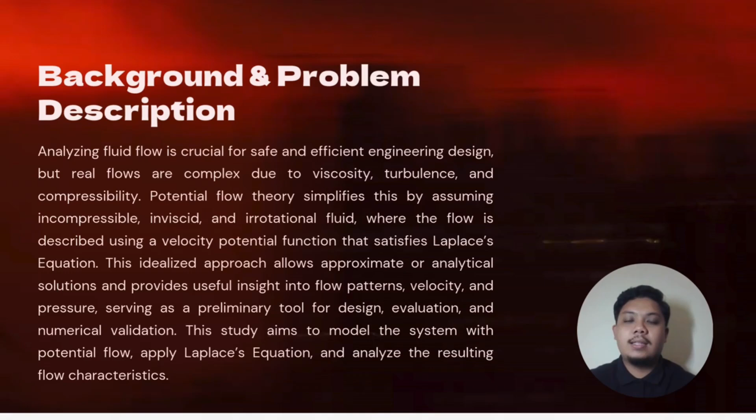For this study, the fluid flow is modeled using potential flow theory. The independent variables are the spatial coordinates x and y, while the dependent variable is the velocity potential. The velocity components are obtained as the spatial derivatives of the velocity potential. To simplify the governing equations,

several assumptions are made. The flow is incompressible, inviscid, irrotational, and steady. Under these assumptions, the governing equations reduce to the Laplace equation, which is an elliptic partial differential equation. This equation forms a mathematical foundation for approximating the fluid flow in this study.

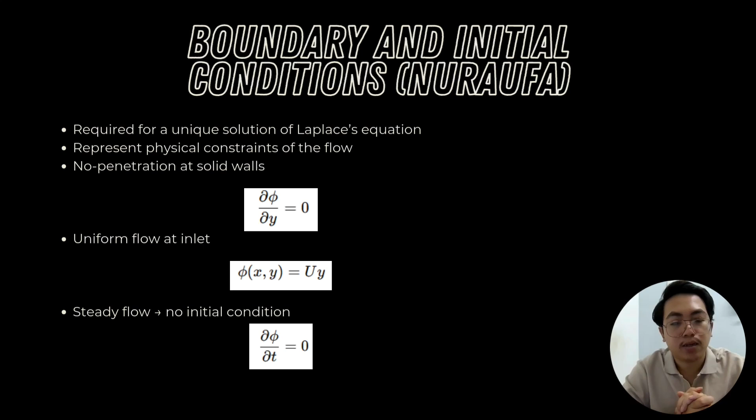Since the flow is assumed to be steady, initial conditions are not required. The next one is the solution methodology. The key point is that the governing Laplace equation is solved using analytical or numerical methods. The chosen method is separation of variables. It's suitable for simple geometry and linear boundary conditions.

So the fluid flow in this study is governed by Laplace equation. This equation can be solved using either analytical or numerical methods. In this project, the method of separation of variables is chosen because the geometry and boundary conditions are simple. This method provides a clear and efficient analytical solution for ideal potential flow.

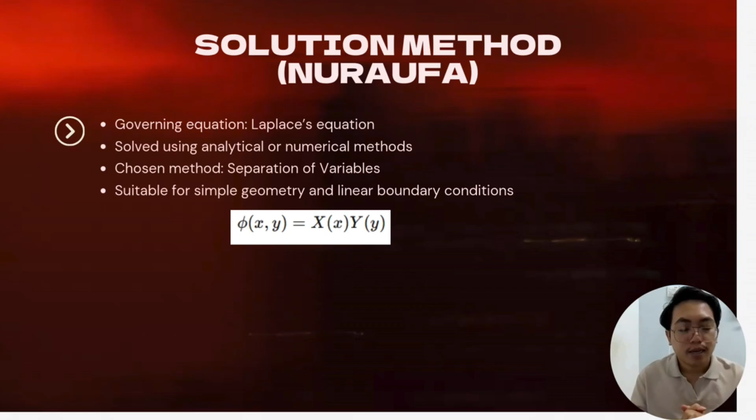My part is solution and sample calculation. First, on the left side, it shows the general solution for the velocity potential obtained using the method of separation of variables. The general form of velocity potential is φ(x,y) = (A cos λx + B sin λx)(C e^(λy) + D e^(-λy)). This is the general solution of Laplace equation for two-dimensional flow.

Next, based on the given condition, we consider a uniform flow where the velocity potential is simplified to φ(x,y) = Uy. This represents a flow moving uniformly in the vertical direction. In the middle part, we verify this velocity potential using Laplace equation. We calculate the second derivatives of φ with respect to x and y. Both second derivatives are zero, so when substituted into Laplace equation, the result becomes zero. This confirms that the chosen velocity potential satisfies the Laplace equation.

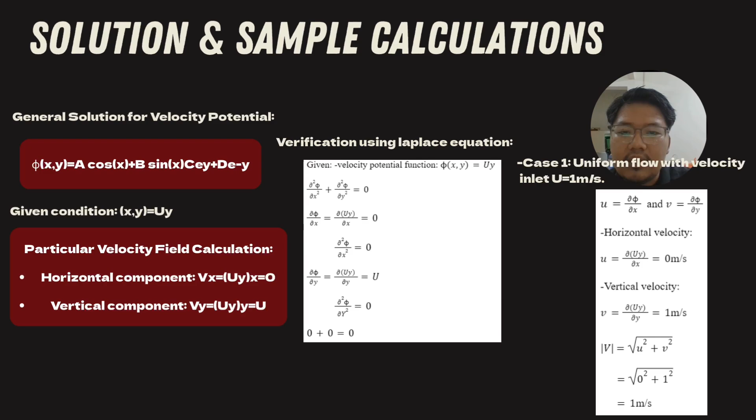On the right side, it shows case 1 where the inlet velocity is U = 1 m/s. Using the velocity potential, we calculate the velocity components. The horizontal velocity u is 0 and the vertical velocity v is 1 m/s. The velocity magnitude is therefore 1 m/s. This result shows that the flow is uniform, steady, incompressible, and irrotational, which is consistent with the assumptions of potential flow theory. Thank you.

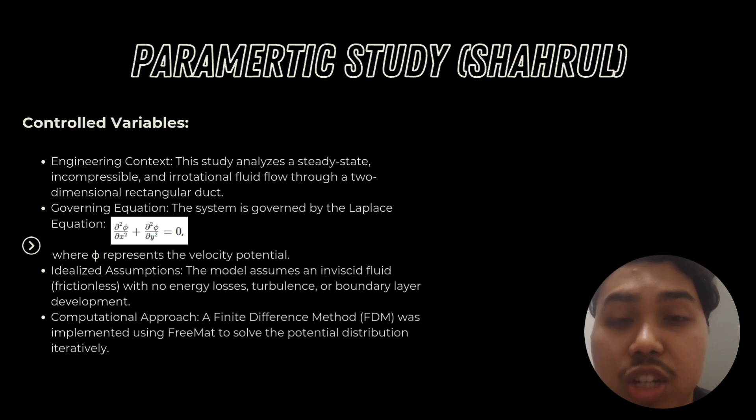To solve this, we implemented the finite difference method in FreeMat, which allows us to iteratively calculate the velocity potential across the entire channel domain. Here, we also include our results for two graphs: the first one uses 1 meter per second, and the second one uses 2 meters per second. To understand the behavior of the system, we conducted a parametric study focusing on two key variables: inlet velocity and channel geometry.

First, we vary the inlet velocity, which is known as u. We found that an increase in velocity leads to a proportional increase in the magnitude of the velocity field. However, the overall streamline pattern remains unchanged, confirming the linear nature of the Laplace equation.

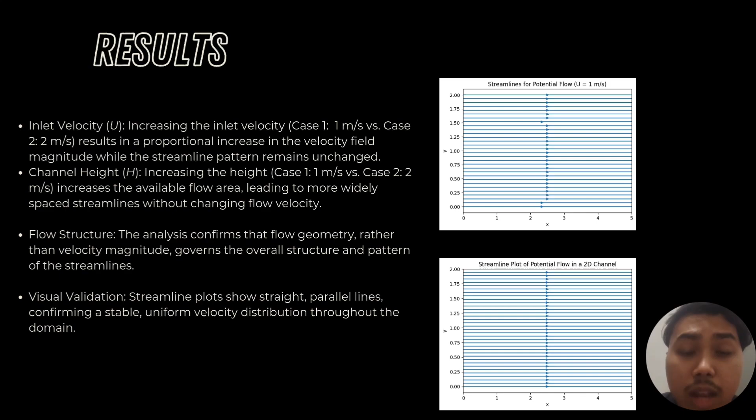Next, we look at the channel height, which is known as h. Our results show that a larger channel height allows the streamlines to spread over a wider area, while a smaller height confines them. Crucially, since we neglect viscous effects, the fluid does not accelerate or decelerate purely based on these cross-sectional changes. As you can see in our first figure, our streamlines are straight and parallel, validating that our model satisfies the boundary conditions for stable and uniform flow.

For the summary, our study confirms that potential flow theory is an excellent tool for preliminary engineering analysis because it provides clear and predictable results for general flow patterns. However, we must acknowledge the inherent limitation of this idealized model because it ignores viscosity. It cannot capture wall shear stress, boundary layer formation, or any energy losses due to friction. It also cannot predict complex phenomena like flow separation or turbulence.

Therefore, while the Laplace equation is perfect for early-stage design decisions and understanding fundamental flow structures, more advanced models, such as those based on the Navier-Stokes equations, will be necessary for a detailed representation of real fluid behavior in practical engineering applications.

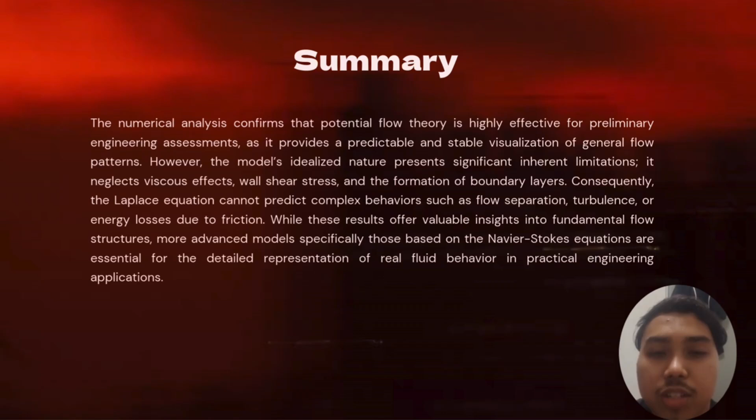Thank you. In conclusion, this project demonstrates how differential equation concepts are applied to approximate fluid flow using potential flow theory and the Laplace equation. By modeling the fluid as an ideal flow and applying suitable boundary conditions, the flow characteristics were successfully represented in a simplified mathematical form. From an engineering perspective, this simplified approach helps us understand basic fluid patterns and system behavior, and it is especially useful during the early stages of engineering design.

Our group project also links to real practice. Even though the analysis is theoretical, it provides a strong foundation before moving on to more advanced methods such as numerical simulation and computational fluid dynamics, or CFD. For future improvement, the analysis can be extended by including more realistic flow conditions such as viscosity and more complex geometries, as well as using computational tools to compare theoretical and practical results. Overall, this project strengthened our understanding of how differential equations are connected to real engineering applications, particularly in modeling and analyzing fluid flow systems.